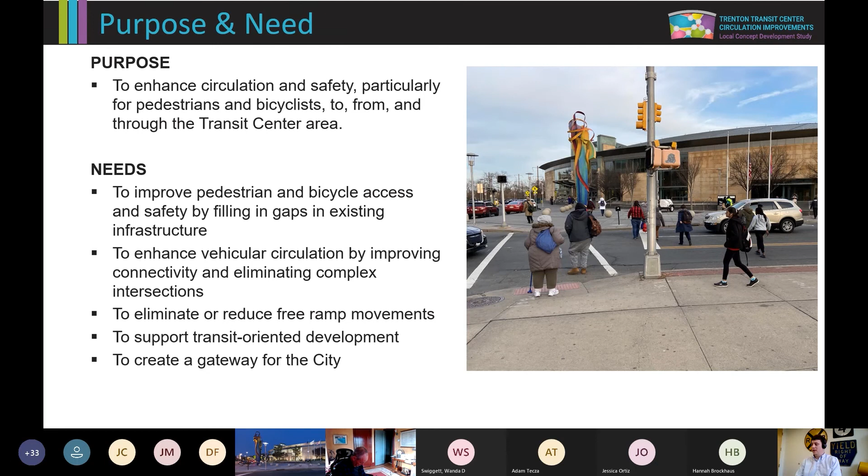The study area is shown in blue. It's mainly focused on the seven main intersections within the study area, but we also recognized throughout the study process that it's not just about the intersections, it's how we interconnect them, particularly regarding pedestrian and bicycle improvements. So we're really covering the entire study area that you see here.

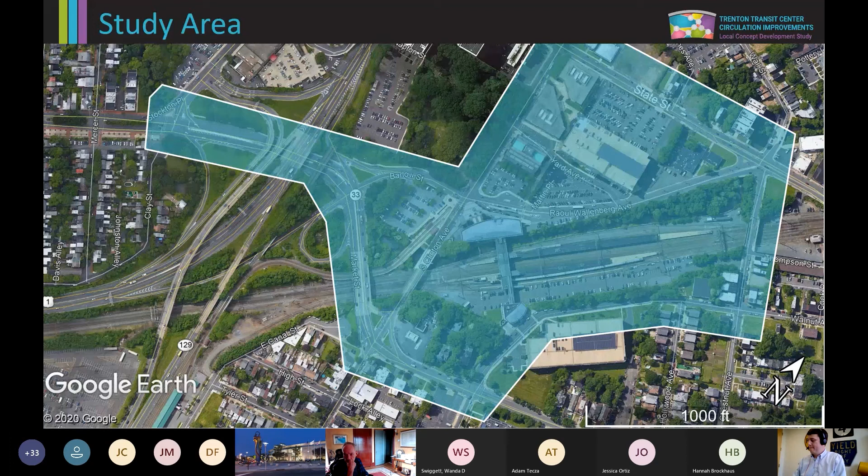The project started back in December, at the end of December 2019. In August and September of 2020, we had the first round of stakeholder and public outreach, including a virtual public information center in September. From there, we took that information and started developing and analyzing alternatives.

We met with our NJDOT subject matter experts in February. That's because this is a process that's part of the NJDOT project delivery process, in which a project goes through concept development and then ultimately into preliminary engineering and final design so it can move into implementation. So that's a pretty important step.

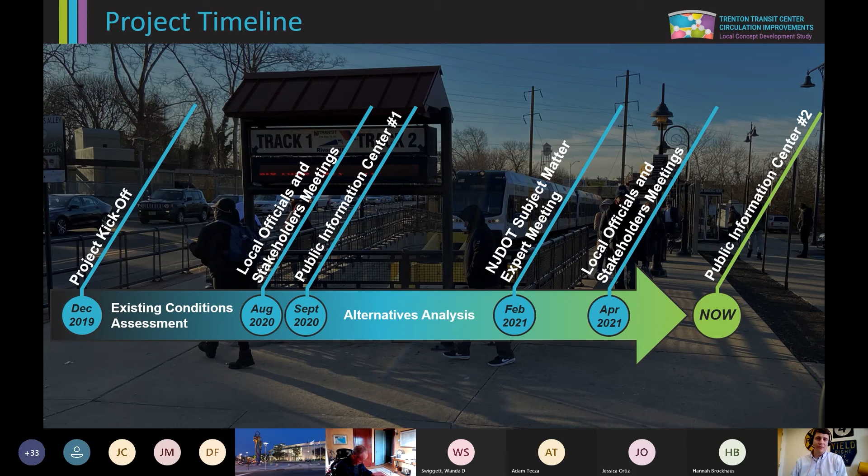We had our local officials and stakeholders meetings a week or two ago, and now we're here with you all this evening for Public Information Center number 2. This is the one where we're trying to get feedback on the alternatives you'll see coming up, and have a discussion. That discussion will help us select features of the alternatives that the public and others support, to develop ultimately a preliminary preferred alternative. We need a preferred alternative in order to advance it through the project delivery process.

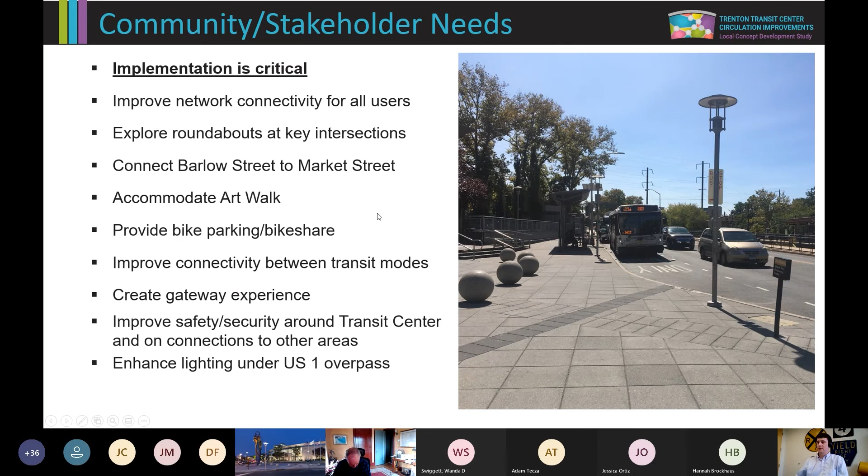Some other needs and opportunities we identified through our own investigation: obviously there are no bicycle facilities, we have narrow sidewalks with gaps in coverage, there are long crossing distances at intersections, particularly those on Market Street, and there's excess vehicular capacity. We have lots of lanes, for example on Market Street, but the volumes don't warrant as many lanes as we have, and we'll talk about that more in a minute.

Some other issues, pictured in the top right, include a very heavy volume of trucks coming off of Route 1, turning onto Market Street to ultimately get to Stockton and then back onto 129, heading over, most of them trying to get to the Turnpike.

We also have signal equipment and ADA curb ramp upgrades that need to be made, shown here in the middle picture. Another key issue we identified was the southbound bus stop on Clinton Avenue, right in front of the transit center. You can see in the picture that the bus blocks the travel lane, so vehicles have to go around it, and vehicles continuing through the intersection or turning right have to turn in front of the bus. There's just a lot of conflict that bus stop introduces, so that's something we also wanted to try to address.

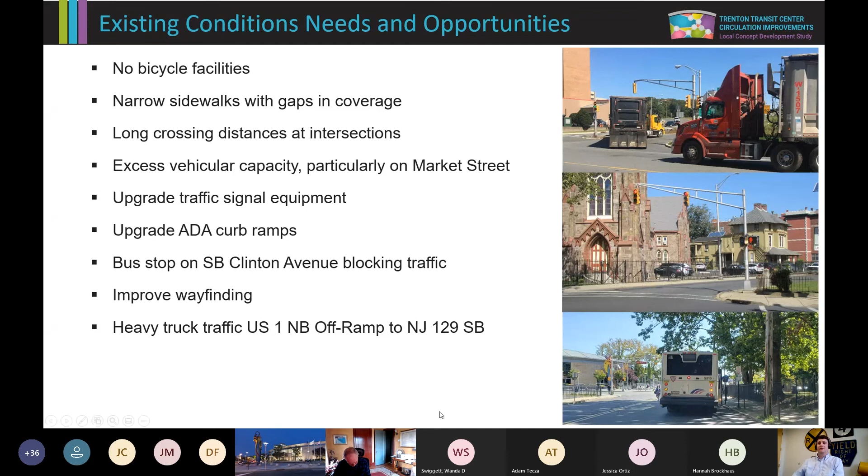We collected traffic volume data in January of 2020, before the pandemic hit and everything shut down, and we analyzed existing conditions at the intersections.

This shows overall level of service, which is like a report card grade, where A means the intersection operates with very minimal congestion, and F means it's operating with a lot of congestion. As you can see, most of the intersections we're studying as part of this study are level of service C or better for the AM peak and the PM typical weekday commuter peak hour. What that's really highlighting to us is that we have a lot of excess capacity that could potentially be reclaimed for pedestrians and bicyclists.

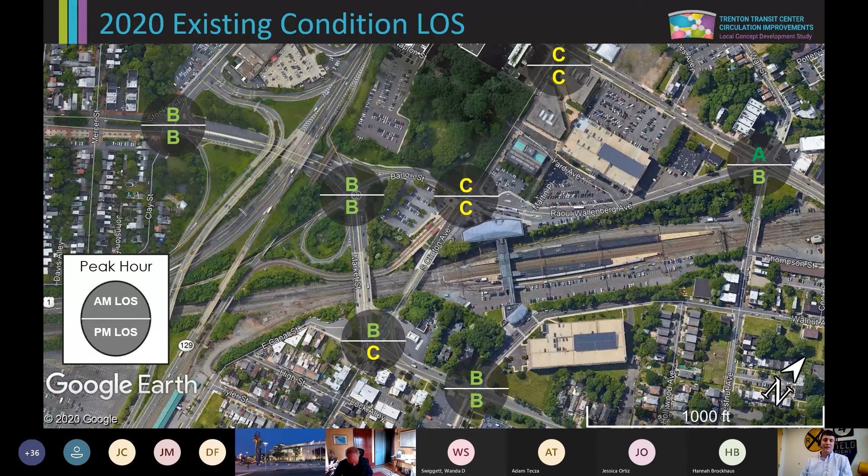When we're talking about level of service in the peak hour in an urban environment, level of service A through D is considered good, level of service E is usually considered not so great, and level of service F is typically considered failing. So the fact that we have a lot of wiggle room in our level of service and operations of the study area roadway network goes a long way to helping us accommodate other modes on the roadways.

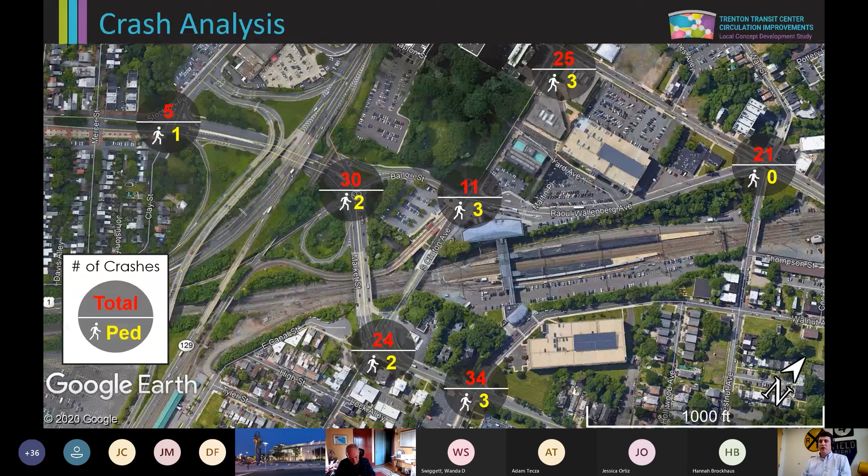Also looking at crashes during the study period, what I really want to highlight is the pedestrian crashes occurring within the area of the transit center. That really highlights that we need to think about pedestrian safety and how we can enhance it at intersections as people try to get to the transit center or just through the transit center area.

So now let's get into talking about the alternatives. We have three guiding principles for the alternatives. The first guiding principle is to make the alternatives feasible.

One of the things that the other studies didn't really focus on was making sure that the recommendations were geometrically and operationally feasible for the roadway network. So that's one thing we wanted to do with the alternatives and recommendations developed as part of this study. The second guiding principle was implementable.

We wanted to make sure we'd limit right of way, that's ROW, which is essentially property impacts. So we didn't want property impacts unless absolutely necessary. We also wanted to minimize environmental and stormwater impacts, because property, environmental, and stormwater impacts can have significant costs associated with them, as well as extend the amount of time it takes to actually get a project implemented.

As a result, we came up with three alternatives. The Market Street Road Diet. Alternative 2 is Market Street Road Diet with a transit, pedestrian, and bicycle only street on South Clinton Avenue. And alternative 3, which is road diets with roundabouts.

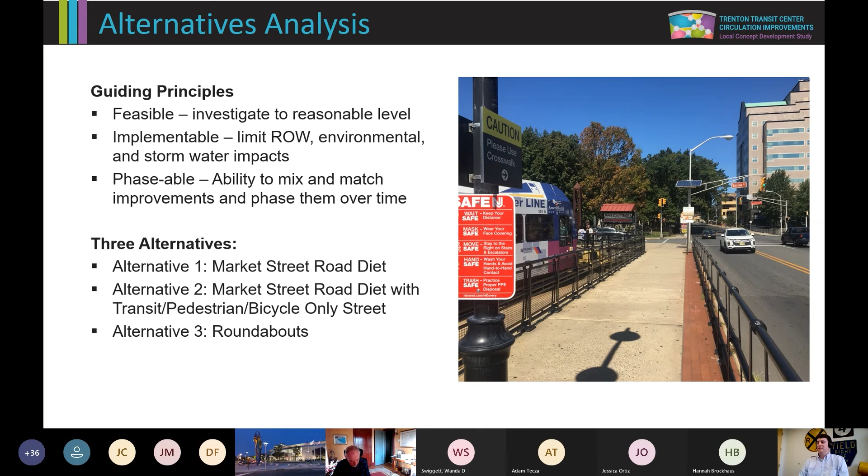Before I showcase the alternatives, we're going to talk about terminology, particularly around bicycle facilities that you might hear me say during the presentation. The first one you'll hear me talk a lot about is protected bike lanes.

If you can see my cursor, that's an example of a protected bike lane where we have the bike lane along the curb, and there's usually either a barrier, a striped area, or even parking that separates the bike lane from the travel way. It helps bicyclists feel more comfortable, and a wider variety of bicycle level riders are able to use this because they feel more separated. Novice riders typically tend to be more comfortable with a protected bike lane configuration.

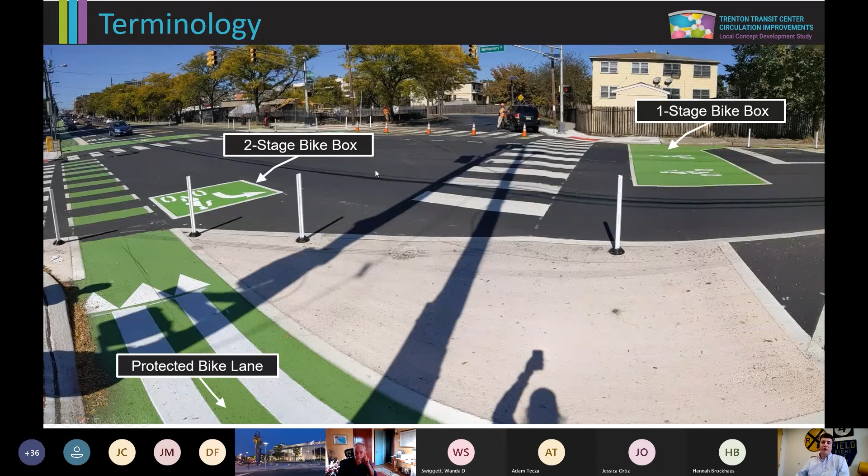We have bike boxes, both 2-stage and 1-stage. These are at intersections to help bicyclists - let's say they're coming down the bike lane and want to turn onto another street. These are areas where bicyclists can wait safely in order to make the turns.

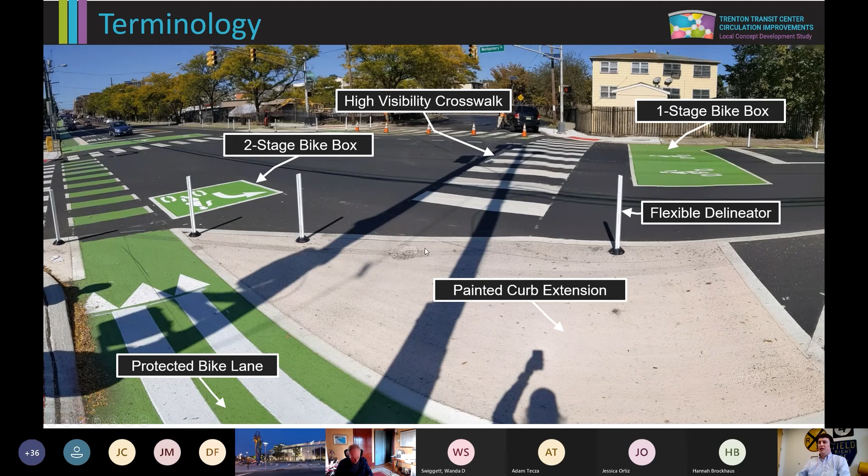High visibility crosswalks are another thing you'll hear me say - this is an example of one. Painted curb extensions are one of the things we can do to reduce crossing distances at intersections by extending the end of the curb, providing more of a protected area for pedestrians. It brings them out so they're more visible to drivers, and also shortens the actual distance they're crossing on the roadway. You can do them with curbing, or in this case with just paint. I've seen them done with artwork and other different colors, so there are a lot of opportunities, and they can be protected by flexible delineators which outline for drivers where they should not be driving. I've also seen planters and other things like that for these types of pedestrian areas.

Another term you'll hear a lot today is super sharrow. A super sharrow is essentially a symbol in the travel lane with a green background that lets drivers know bicyclists may be traveling in the travel lane. These are used in areas where we want bicycle activity, but don't have the space to provide a bicycle lane. And then finally, a raised intersection.

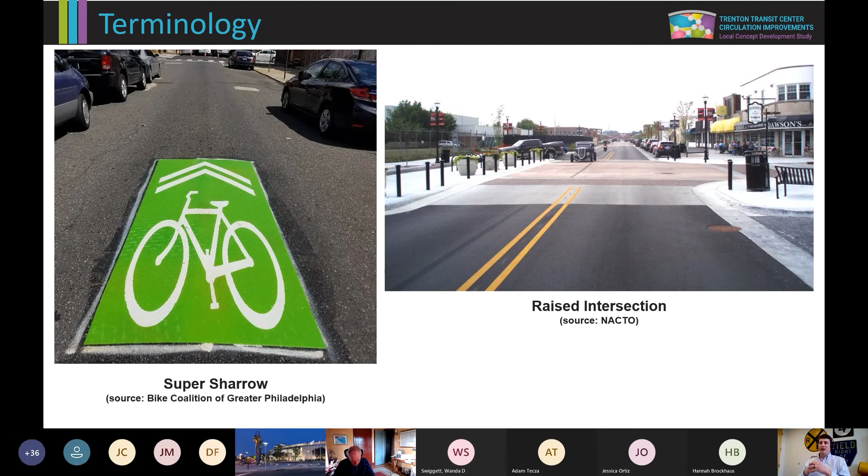You can see an example of one in this picture. This is basically where the intersection, if you're driving, is actually raised, so you have to slow down to drive through it. It also brings pedestrians up to the same level as the cars, so they're more visible.

There are several common recommendations common to all alternatives. I'm not going to read each one of these, but things like improved lighting, ADA accommodations, high visibility crosswalks, and leading pedestrian intervals - that's when the walk symbol at a traffic signal displays for a few seconds before the green light comes on, allowing pedestrians to begin crossing before vehicles try to turn across the crosswalk. Also upgrading signal equipment and improving wayfinding for both pedestrians and drivers, making it easier for them to navigate around the transit center area.

And once you're a pedestrian and you get off at the transit center, how do you get to some of the major destinations within the study area? I'm not going to talk about these each individually, but they're common to all of the alternatives we'll be talking about today.

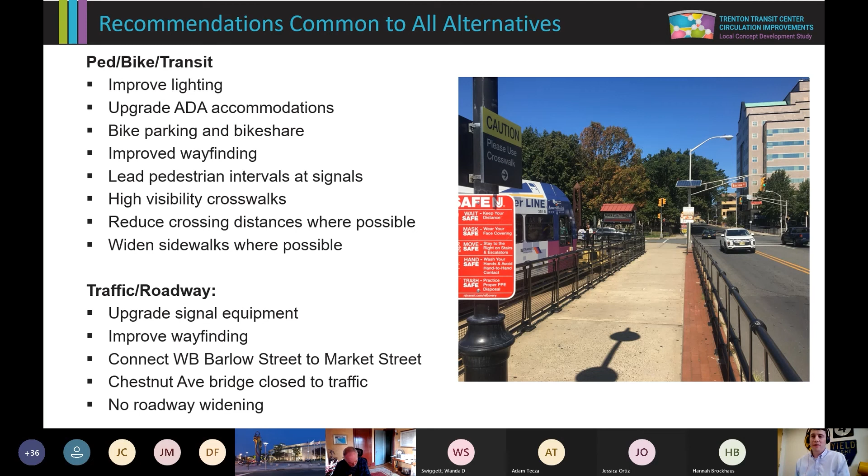I'm going to show an overview of the alternatives, and then we're going to zoom into the intersections and take a more detailed look.

In Alternative 2, it's a similar configuration on Market Street. We're relocating the ramps that go to Route 1 over to here, and we'll zoom in so they're easier to see in a few slides. This section of Clinton Avenue, between Barlow Street and Market Street, would become a street only for buses, pedestrians, and bicyclists. Vehicles would be routed around on Market Street to Barlow Street and then back to Clinton Avenue as part of this alternative. The other key feature is providing bike lanes on State Street and Clinton Avenue in lieu of the parking you saw in Alternative 1, and a realignment of Wallenberg Avenue.

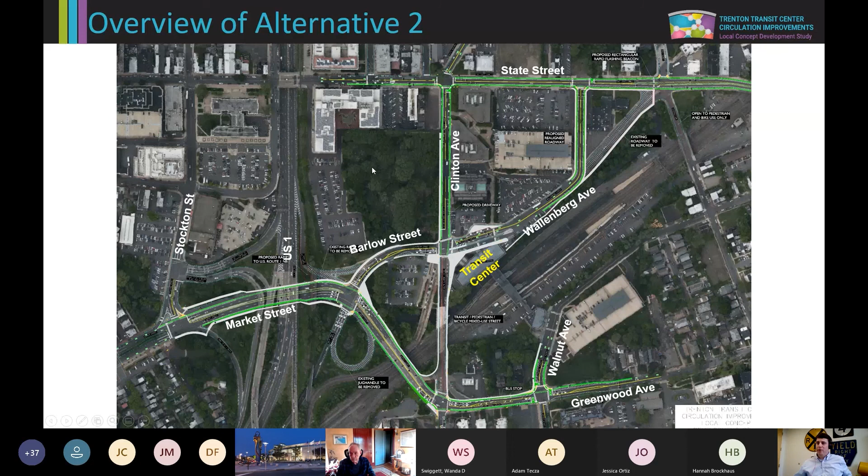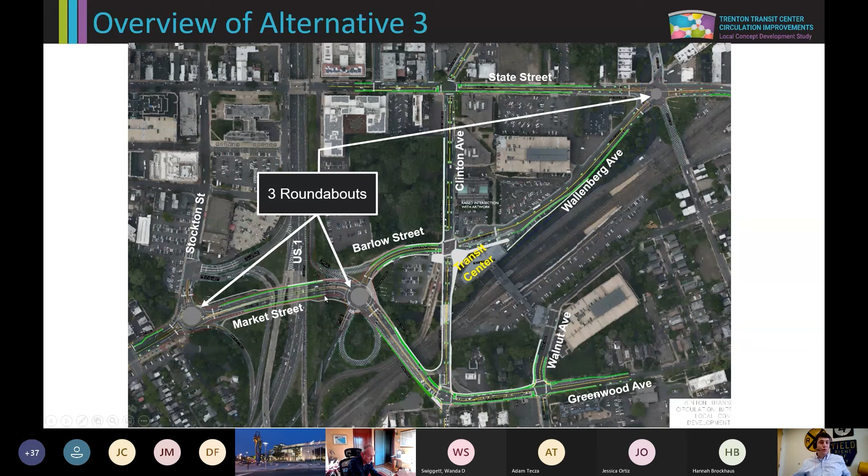Alternative 3 includes 3 roundabouts. We are no longer considering Alternative 3 as part of this study. There were several issues, including property impacts, impacts to the structures over the creek, distance issues particularly here at Stockton Street between the intersections, and impacts to pedestrians. There's a variety of reasons why we felt these roundabouts were not feasible for this application, so we are no longer going to consider Alternative 3, and for the rest of the presentation we'll only be focusing on Alternatives 1 and 2.

The first intersection I'm going to talk about is Stockton Street and Market Street, over here on the left side of the study area.

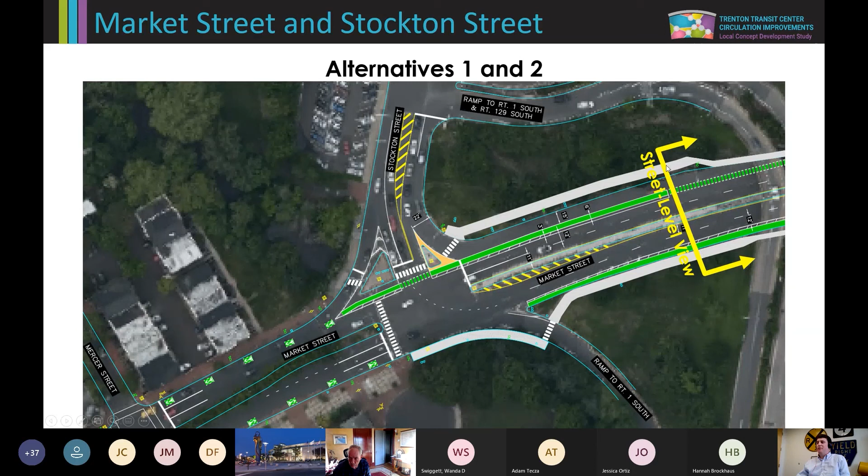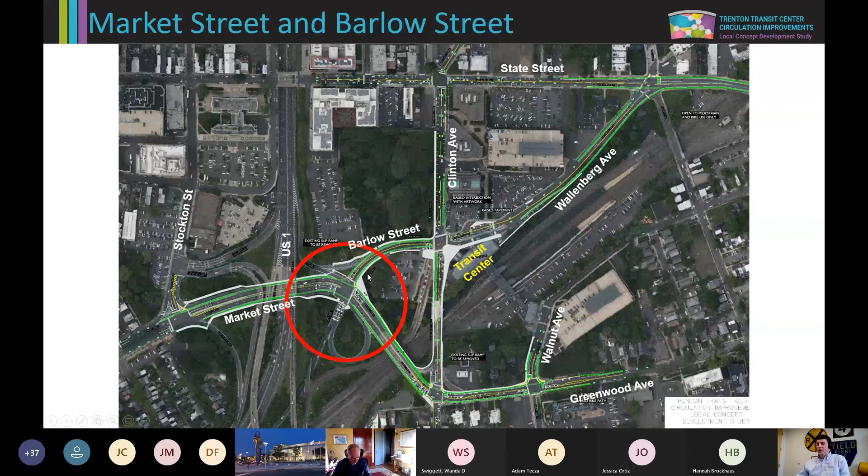Moving further east on the corridor, now over to Barlow Street and the Barlow Street and Market Street intersection. Alternatives 1 and 2 are shown side by side here because they are different. On the left side is Alternative 1. This slip ramp would be removed, and Barlow Street would be brought into the intersection with Market Street, providing access to Market Street. If you wanted to access Route 1, you would simply turn right and use this section of the ramp. You can also see the road diet on Market Street, with fewer lanes in order to provide those protected bike lanes.

In Alternative 2, both of the slip ramps in this area are removed and replaced with a new ramp here. The reason for the new ramp is that it results in vehicles needing to turn more slowly across the pedestrian and bicycle area, providing a more visible condition for pedestrians and bicyclists and slowing vehicles as they turn before continuing on the ramp. The other feature is that the jug handle would be removed, with a left turn lane added from Market Street directly onto Barlow Street—so instead of going around the jug handle, now you can make the left turn.

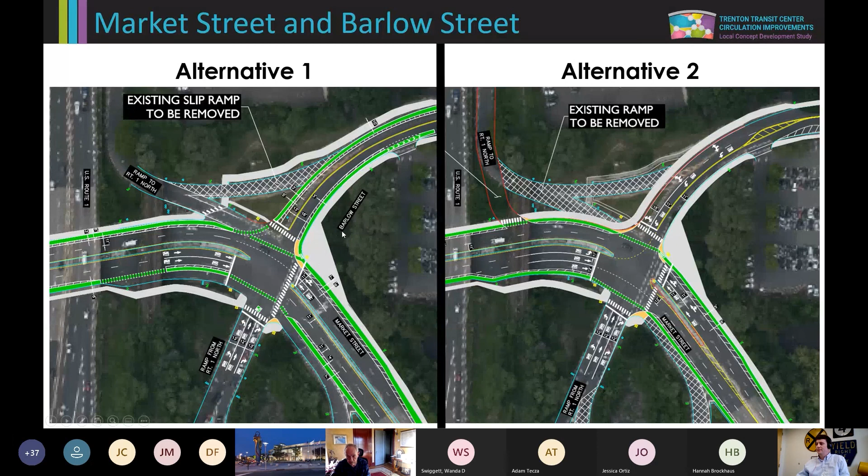Next, we'll move down to the Greenwood Avenue section of the study area. In Alternative 1, there are a few features to talk about. The first is that the channelized right turn on Clinton Avenue would be removed, since we now have that connection to Barlow Street and no longer need to provide it. That actually helps us a lot with controlling pedestrian conflicts.

Greenwood Avenue would undergo a road diet where we'd have one travel lane in each direction with a center turn lane, so that we can provide the protected bike lanes. You can see similar changes here at the Walnut Hudson Street intersection, where we would be providing more bicycle facilities connecting up to the transit center area, that secondary entrance of the transit center.

In Alternative 2, it's a very similar configuration for Greenwood Avenue, but the only major difference is that this section of Clinton Avenue is now closed to vehicular traffic. It's only for pedestrians, bicyclists, and transit.

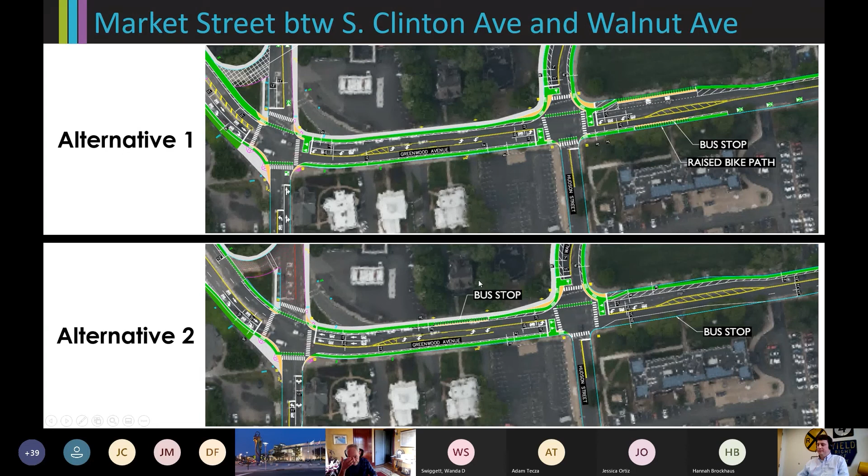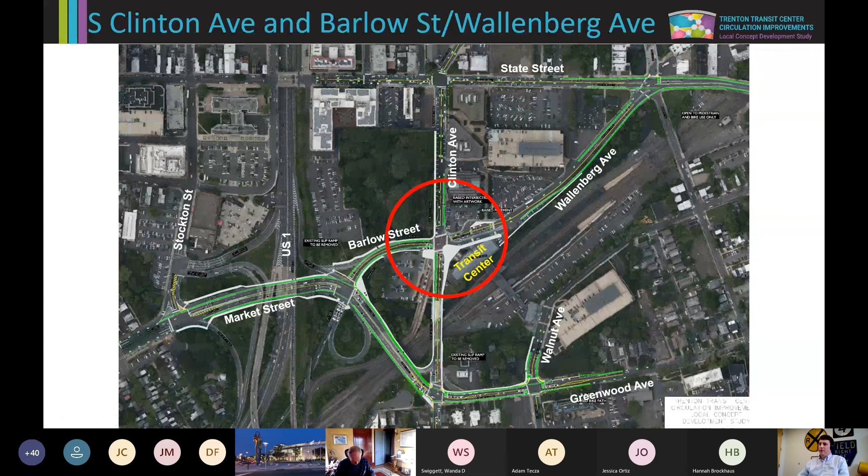Moving further up to South Clinton Avenue and Barlow Street, this is the main intersection in front of the transit center area. I'm just going to talk about the zoomed-in view on the right. You can kind of see what's happening on the left, which is a wider view, while the right is a more zoomed-in view of the intersection.

We have recommendations for a raised intersection that can support some artwork, which would help make pedestrians more visible and have drivers slow down as they pass through. The other key part of this alternative is modifications to this paved area that provides access to the surface parking. We would maintain the surface parking and access to it, but have a raised driveway so pedestrians are more visible and prominent to drivers, who have to travel across that area more slowly. We'd also use some of that area to provide a bus or shuttle stop closer to the transit center.

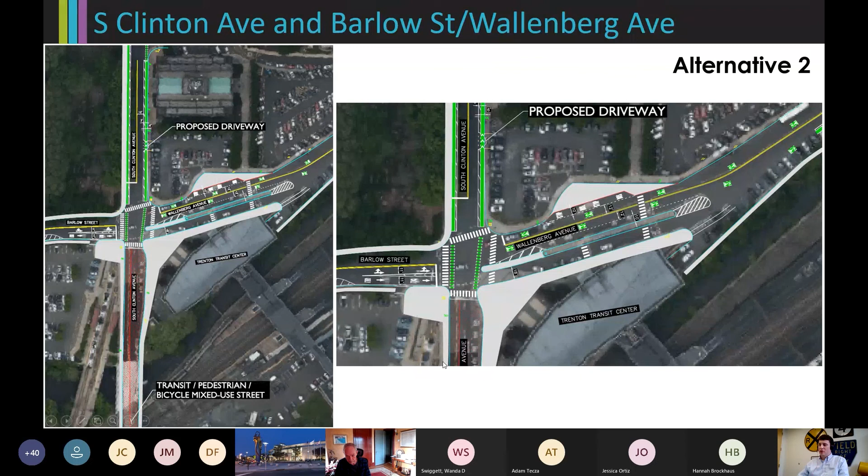In Alternative 2, this is the north end of that pedestrian, transit, and bicycle only street. The existing bus stop in this area would now be moved into the transit area, taking it out of the travel lane. We're also able to modify the drop-off area for the transit center, extending it to provide more area for drop-off that won't conflict with the intersection, and completely closing off access to the surface parking to provide a larger drop-off area on westbound Wallenberg Avenue, replacing it with a driveway to the surface parking lot on Clinton Avenue instead.

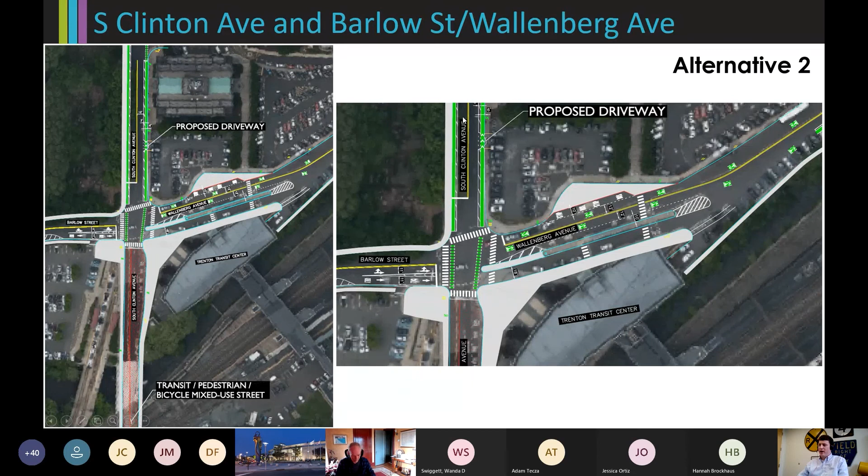We recognize that this alternative is certainly one that merits a lot of consideration. On one hand, you have benefits to pedestrians, bicyclists, and transit users, particularly because we have a lot of transit user movement between the light rail station on one side of Clinton Avenue and the transit center on the other. However, it does have impacts to vehicular circulation for vehicles traveling on Clinton Avenue.

We are maintaining, in all of these alternatives, level of service D or better at all intersections, which is considered acceptable, but it is certainly a degradation from the level of service C we're seeing at some intersections. So it's a trade-off that definitely warrants discussion, and I hope we'll have some discussion on that today to give the project team more guidance.

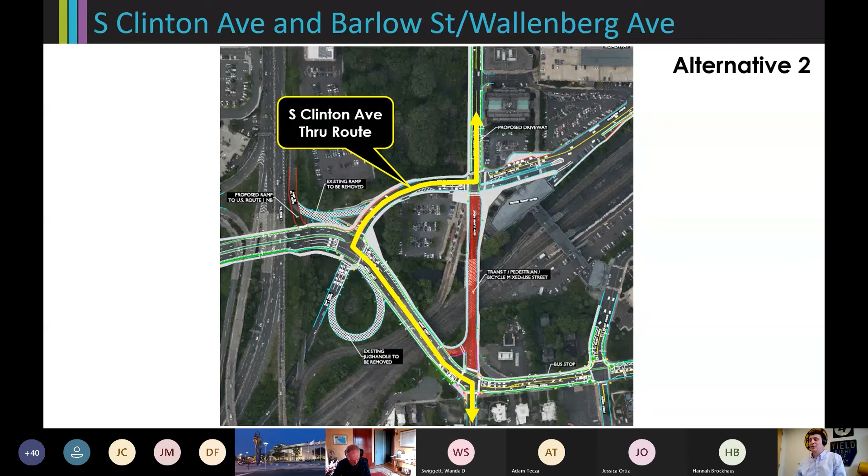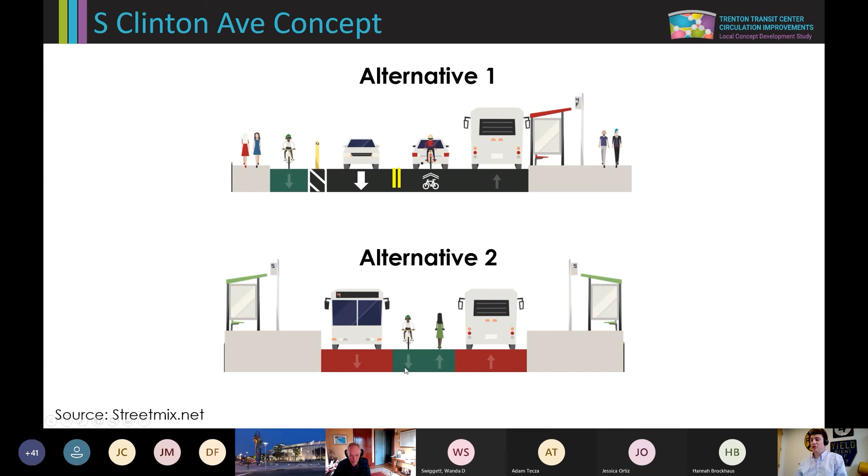Here's an example: if you were standing on that section of Clinton Avenue in Alternative 1, you would see how we can provide protected bike lanes, but also some sharrows due to the limited space we have. In Alternative 2, we can provide wider sidewalks, level bus boarding, and some bike facilities — this is in the pedestrian, transit, and bicycle only street alternative.

So, of course, we want to ask a question about this one because it's something we love to hear. Based on your initial impression of this conversion, what do you think about it? Do you like it? Do you not like it? Do you need to think about it some more?

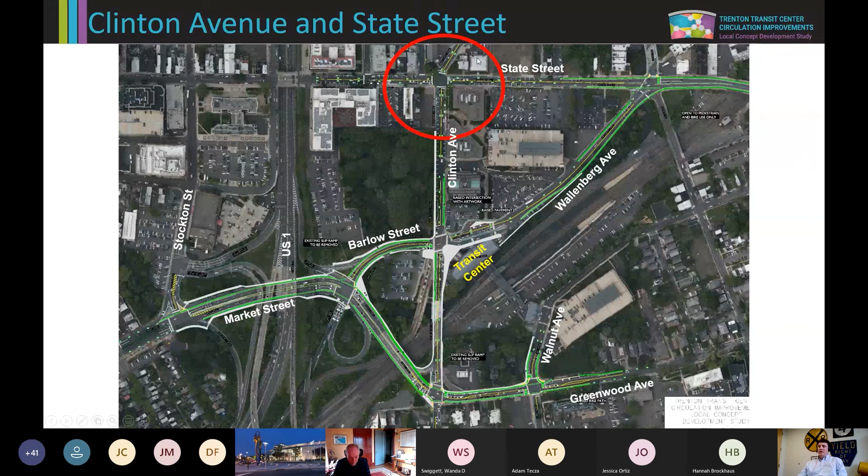Let's move on to the next slide. Now we're going to talk about Clinton Avenue and State Street. In alternative one, we wanted to maintain the on-street parking. There were several comments in the stakeholder outreach that this parking is particularly important for people who want to access some of the agencies in this area, so we wanted an alternative where that's provided. However, we don't have enough room to also provide protected bike lanes.

So in this case we're using super sharrows, meaning bicyclists on Clinton Avenue would be traveling in the main travel lane. The other feature is we're able to provide left turn lanes on State Street to keep vehicles that want to turn left from blocking through vehicles.

In alternative two, the on-street parking pretty much goes away except in front of the businesses on the west side of the image. We do provide protected bike lanes throughout. On the north side of Clinton Avenue there's really not enough space, so we're going back to super sharrows at that location as it exits our study area.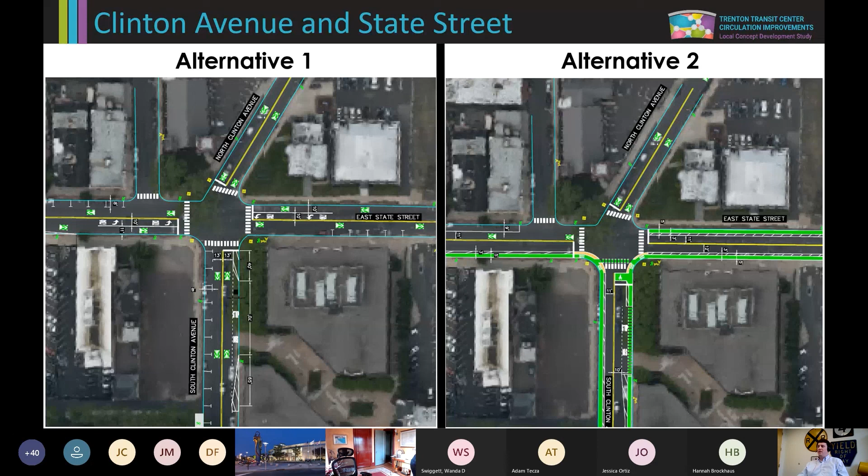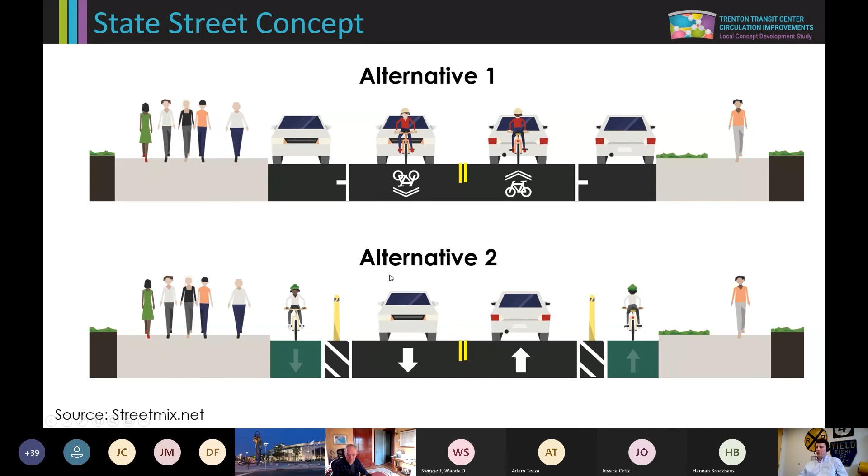So if you were standing on this yellow line on the street, in alternative one the configuration would look like this at the top. Alternative two is what the configuration of the roadway would look like with protected bike lanes rather than parking.

Another poll question: we want to hear from you about removing on-street parking. Do you think we should keep the parking, or remove it and provide the protected bike lanes, or are you not sure yet? You can answer C if you'd like to consider it more. We'll give everybody a minute to get the answer in.

It seems overwhelmingly that, at least right now, the protected bike lanes are the popular option. All right, I'm going to go ahead and move on to the next slide.

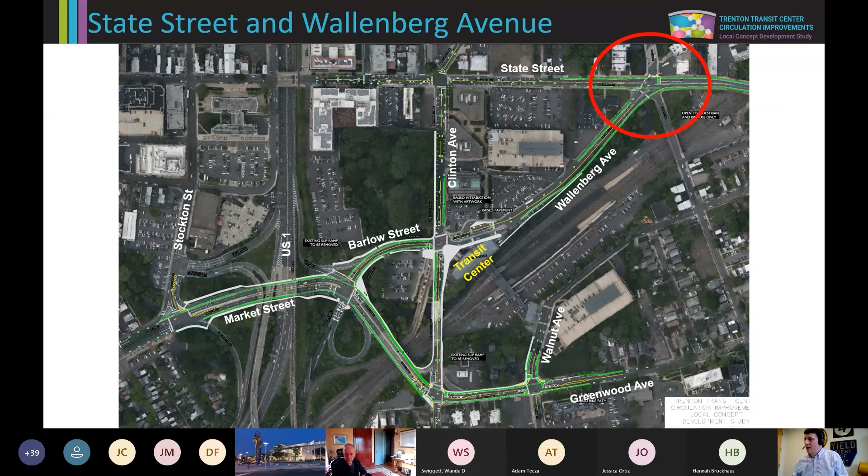Our final intersection to talk about is the five-leg intersection of Wallenberg, State Street, Wall Street, and Chestnut Avenue. In alternative one, because the roadway widens out at the intersection, we're able to keep the travel lanes but provide protected bike lanes. We transition folks from the super sharrows into bike lanes to get through the intersection. We can also provide protected bike lanes on Wallenberg Avenue as well.

As part of a separate project, Chestnut Avenue is planned, sometime in the future with no exact timeline, to be converted to a pedestrian and bike only crossing over the railroad tracks. That's why it's shown as closed in this alternative. However, this alternative would work even if Chestnut Avenue remains open.

In alternative two, Wallenberg Avenue is moved from its current location and realigned. This was a recommendation from the TOD plan to realign this intersection. It makes the intersection much more condensed and easier for pedestrians to cross, and similarly simplifies the existing intersection as well.

Without this leg coming in, we wouldn't necessarily need the traffic signal anymore, because Wall Street is one way away from the intersection. We would maintain a crossing here, either as a signalized crossing or using rectangular rapid flashing beacons, to allow residents on Wall Street to cross conveniently and continue down to the transit center area.

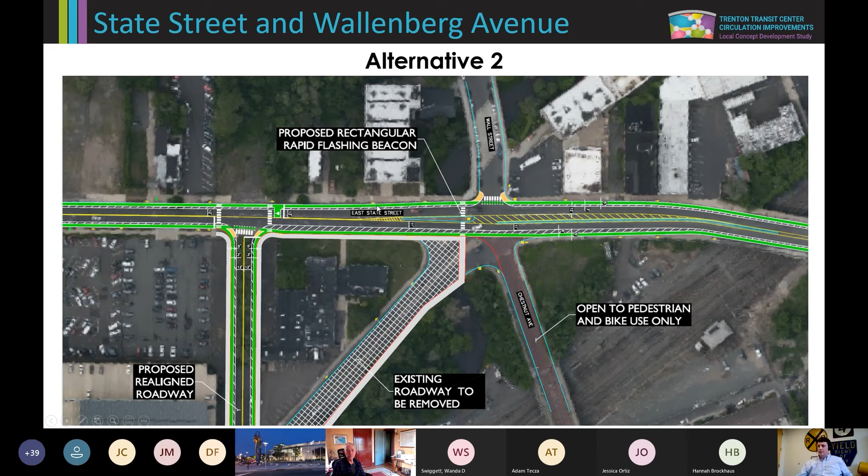However, if you look at traffic operations, alternative 1 does a slightly better job for managing operations because alternative 2 has that closure of Clinton Avenue. There's no property impacts on either alternative. We also don't anticipate any environmental impacts, just very minor stormwater management impacts for the additional pavement for wider sidewalks.

And for that Barlow Street connection. In terms of parking, in alternative 1 we're losing 18 on-street parking spaces on State Street. But in alternative 2, because we're removing the on-street parking to provide protected bike lanes, we're losing 30 on-street parking spaces on Clinton Avenue and 65 on State Street. So there needs to be some discussion about how to mitigate that loss.

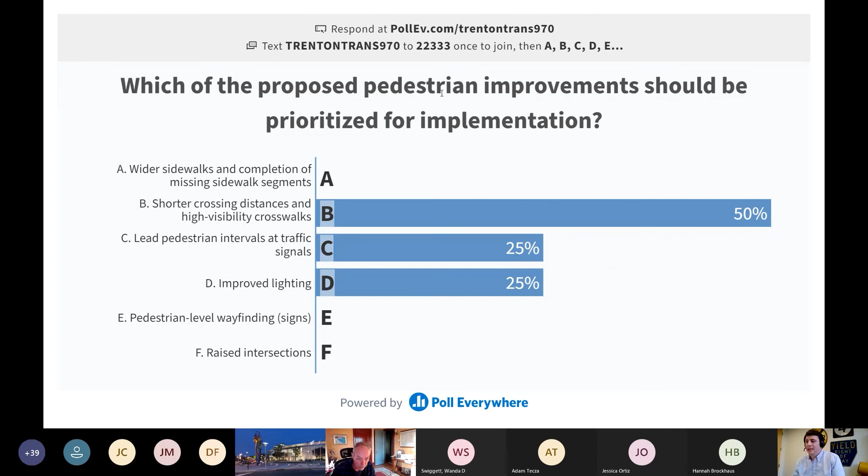I'm going to move on to the second question. It's basically a copy of the first, but now asking about pedestrian improvements. What are the most critical things we should focus on when developing our preferred alternative in terms of pedestrians? Is it wider sidewalks and missing sidewalk segments, better crossing conditions, lead pedestrian intervals, improved lighting, pedestrian level wayfinding, or raised intersections?

Give everybody a minute to go ahead and put in their answer.

So we're saying shorter crossing distance and high visibility has moved definitely towards the majority, with wider sidewalks and improved lighting coming in at a tie for second place. Thank you for those responses. I'm going to move on to the next slide.

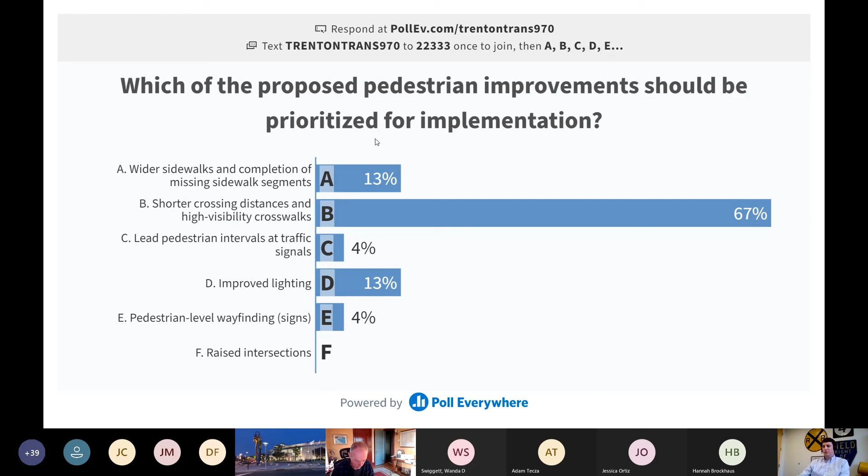If you don't get a chance to respond for some reason, a technical issue, as we talked about at the beginning of the presentation, this presentation will be posted online, and there will be a survey link with these same questions. So if you want to go back and input your information, or if you're watching this online after the meeting, you can use that survey to answer these questions you see on the screen.

So what are our next steps? Right now we're here trying to elicit feedback from the community to help us select a preliminary preferred alternative. It could be pieces of either alternative, it doesn't have to be alternative 1 or alternative 2, it could be a combination of both. But we're here to help us select that preliminary preferred alternative.

After the meeting and the public comment period that follows, we will develop a preliminary preferred alternative plan and post it to the project website, which is on the right, and then elicit any final comments from the public and complete and submit the concept development study document.

As mentioned at the beginning of the presentation, this is the first step in NJDOT's project process. You have a concept, we select a preliminary preferred alternative, then it gets moved into preliminary engineering, final design, and construction. So after this study, we'll work towards securing funding sources for that engineering, design, and construction. I understand the city and DVRPC are already working on getting money secured in the TIP, which is the program that budgets for upcoming projects.

Once that funding is secured, the preliminary preferred alternative goes to engineering and design, and ultimately to construction. The ultimate goal of this project is to have something that will move forward and get implemented. I think the alternatives we've come up with, in that they all basically are changes within the existing pavement area—we're not widening roadways, we're using the existing space and just reallocating resources—will help hopefully make it easier to implement.